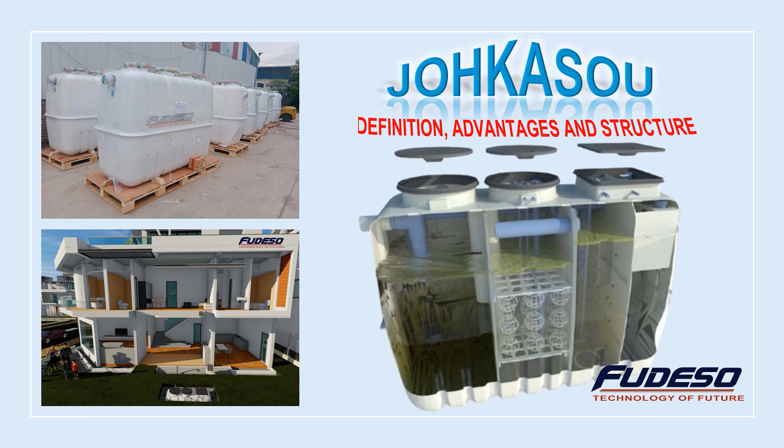Some of you may have heard of the word Johkasou. Today, let's find out what Johkasou is, and the advantages and structure of this system.

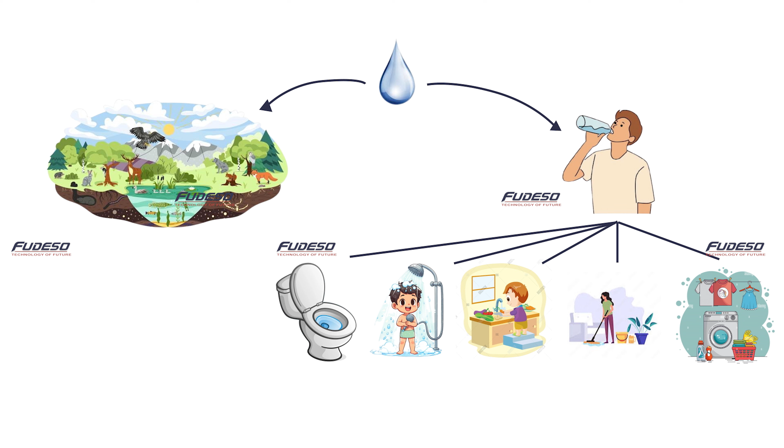As you know, water plays an important role in human life and the natural environment. But do you know that all of our activities can pollute water? Our eating, bathing, and manufacturing activities release pollutants such as BOD, COD, TSS, etc. If not treated and released into the environment, it will affect the ecosystem and the water source itself.

Especially in residential areas, urban areas, and cities, water pollution due to daily activities is more likely to occur. Due to high population density and complex distribution, the concentration of pollutants is higher. If not treated, this polluted water source will return to affect the lives of people in that area.

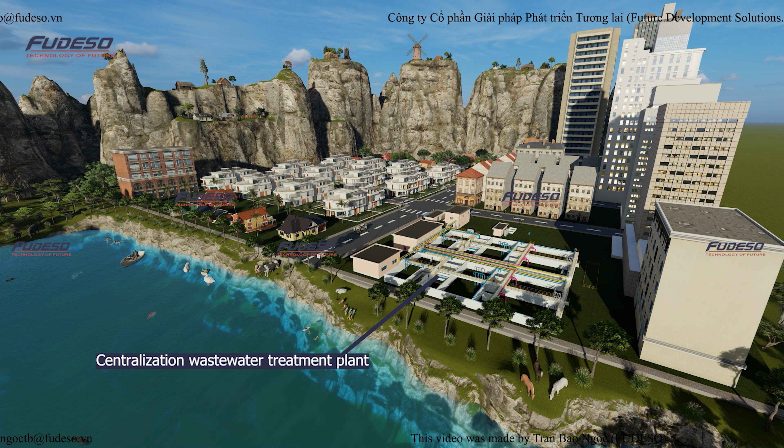Thus, domestic wastewater treatment is a mandatory requirement to preserve water resources. Centralized wastewater treatment plant is also a solution. However, it is not suitable for all cases, especially in areas without synchronous planning for wastewater collection pipeline system and land area to build centralized wastewater treatment plant.

For example, old towns or urban areas built a long time ago, rural areas where housing and population density are sparse, mountainous areas or areas with complex terrain, difficult to install wastewater collection pipe network system. Tourist areas and villas have scattered and inconsistent locations of houses, areas that suffer from many natural disasters such as earthquakes, landslides, etc. The installation of wastewater collection pipelines is prone to risks of breakage and fracture.

The project is divided into investment phases. For example, the project is expected to build 200 houses, 100 houses in the first phase. However, it is necessary to build a pipeline system and a centralized wastewater treatment plant for 200 houses right from the beginning. This is wasteful and expensive.

In addition, centralized wastewater treatment plants cause loss of space, odor, and noise, affecting the living environment and aesthetics of the city. We would like to offer a more effective solution, which is to use Johkasou.

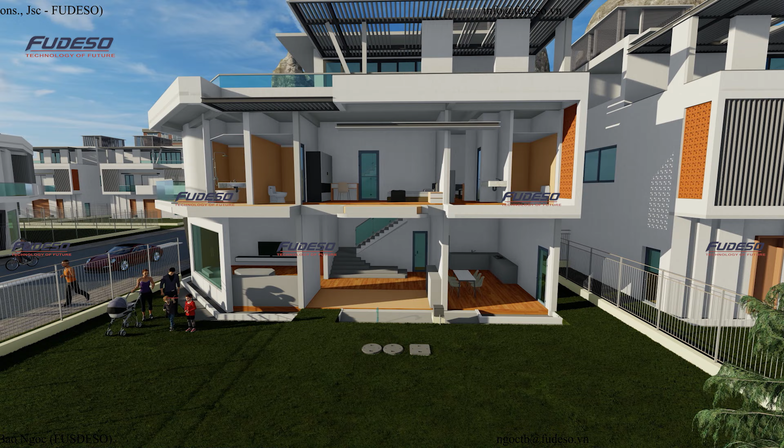So what is Johkasou? In Japanese, joka means cleaning, so means tank. Johkasou is an on-site wastewater treatment system originating from Japan. The characteristic of Johkasou is that it can treat black wastewater, which is wastewater from toilets, and gray wastewater, wastewater from cooking, washing, bathing, etc., right at the source of pollution before releasing it into the environment.

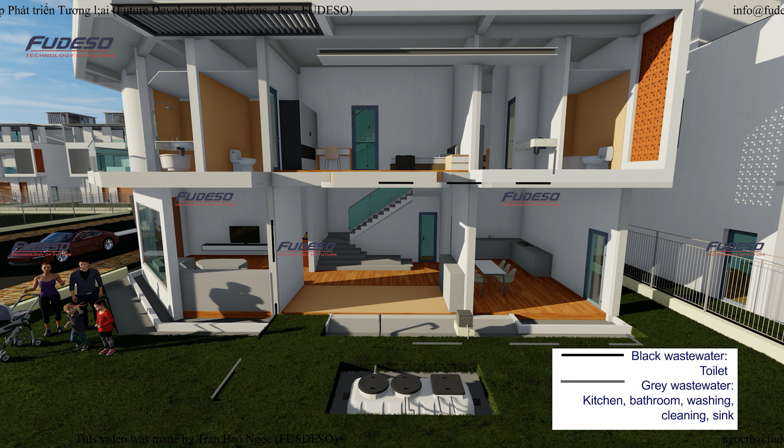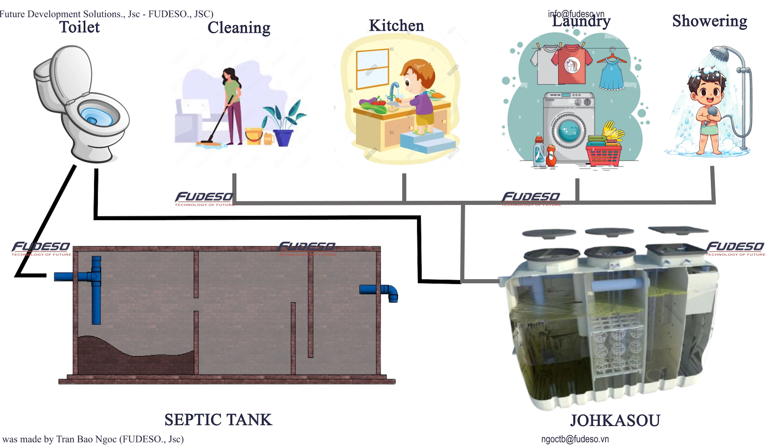Johkasou has many advantages. While traditional 3 to 4 compartment septic tanks can only receive black wastewater from toilets, Johkasou can receive all wastewater from daily activities including toilets, bathing, washing, cooking, cleaning, etc.

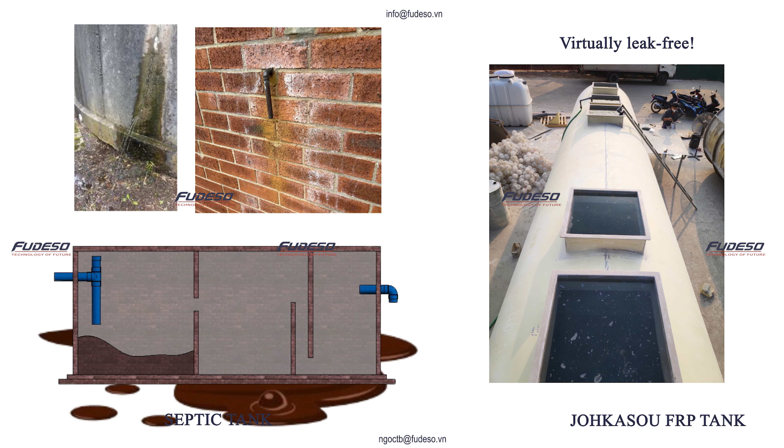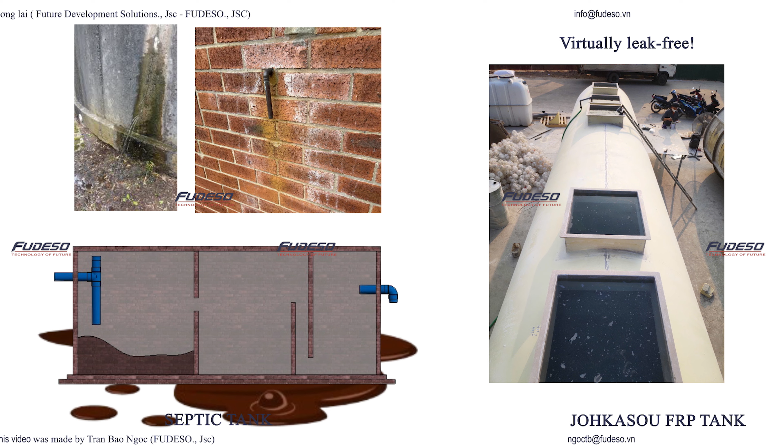Second, it has good waterproofing ability. For concrete or brick tanks, making waterproofing is very complicated. If the waterproofing is not good, or natural disasters such as earthquakes, subsidence, landslides occur, these tanks are very susceptible to leakage and cause mass environmental incidents. While Johkasou uses FRP shells, which are carefully tested for water leakage before leaving the factory, there are almost no water leaks.

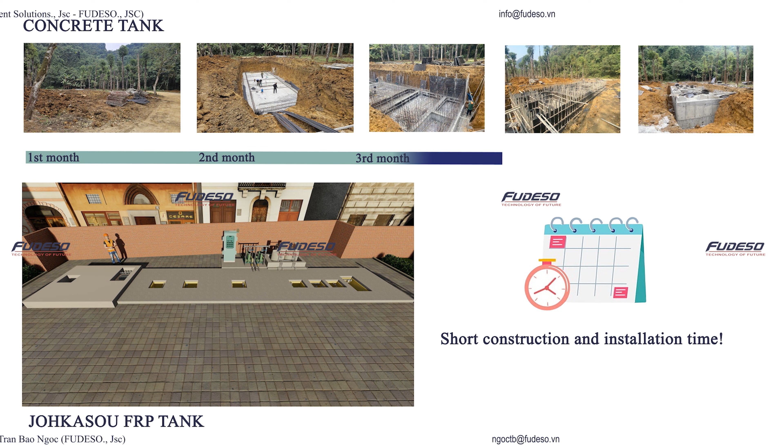The third advantage is that Johkasou has a short construction time, only about 1/3 to 1/2 of the time compared to building a concrete tank or a brick tank. Johkasou installation requires less construction work that affects the current state of the building's surface. The work is simple, just digging a hole, building a foundation, lowering the tank and filling sand around the tank.

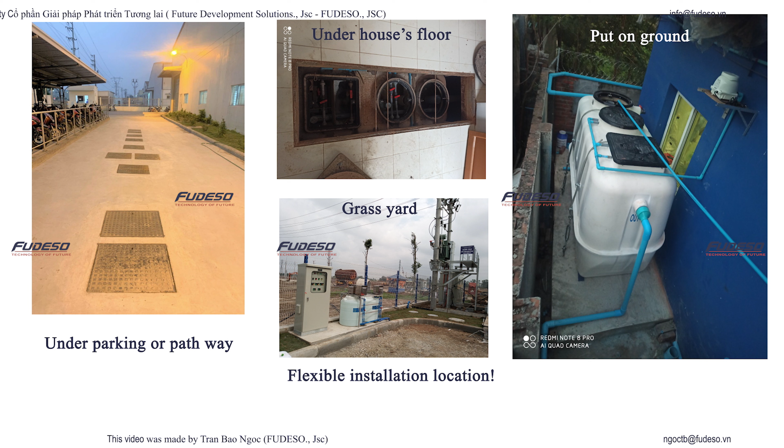Next, Johkasou has a flexible installation location. Because of its compact structure, Johkasou can be flexibly installed in many different places such as above ground, under the garage, walkways, floors, grass yard, and can even replace the traditional septic tank in your home.

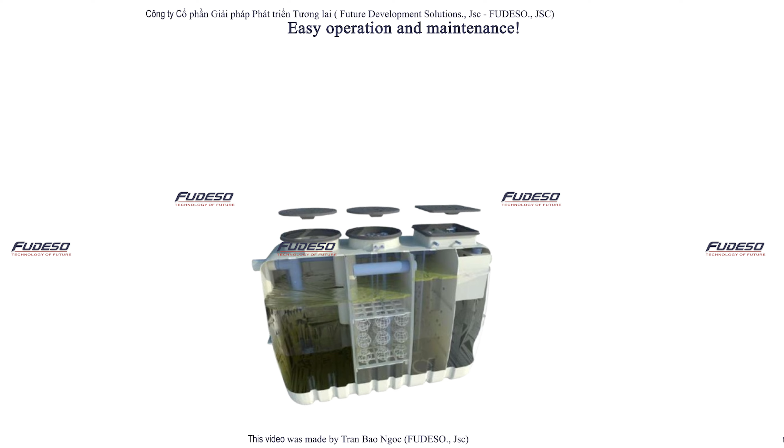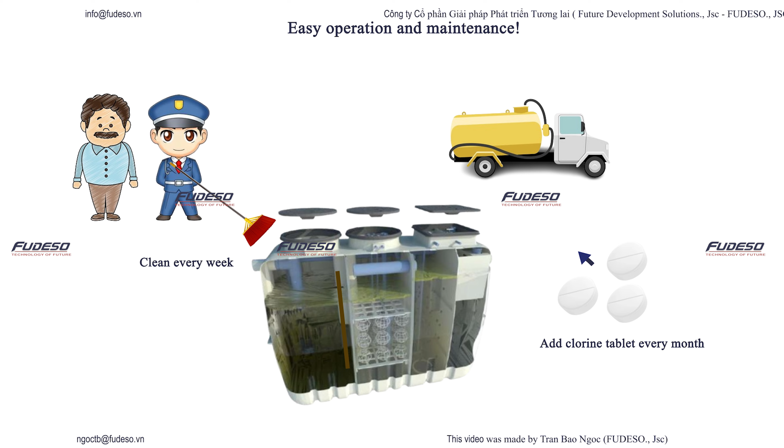Easy to operate and maintain. The Johkasou system is very easy to use. Even a building security guard or a father in the family can operate and maintain the Johkasou. Just remember 3 simple steps: weekly preliminary cleaning, monthly addition of disinfectant chemicals, and annual call for a desludge truck.

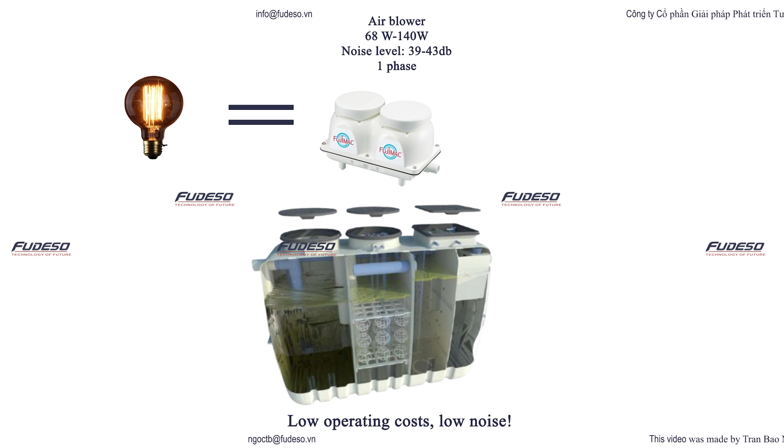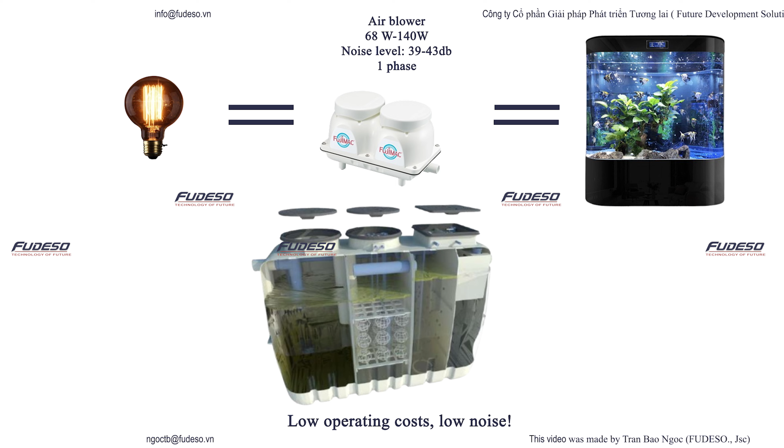Are you worried about the electricity bill for Johkasou? Don't worry. Because Johkasou mainly uses microorganisms to treat wastewater, it consumes very little electricity and chemicals. For a 1, 2, 3 cubic meter per day Johkasou system for households, Johkasou's air blower only consumes 68-140 W, equivalent to an incandescent light bulb. In addition, the noise level of these air blowers is only equivalent to a household fish tank oxygenator.

Johkasou can be used for many buildings with different purposes such as civil houses, villas, residential areas, guardhouses or warehouses, farms, tourist areas, office buildings, hospitals, factories and hotels.

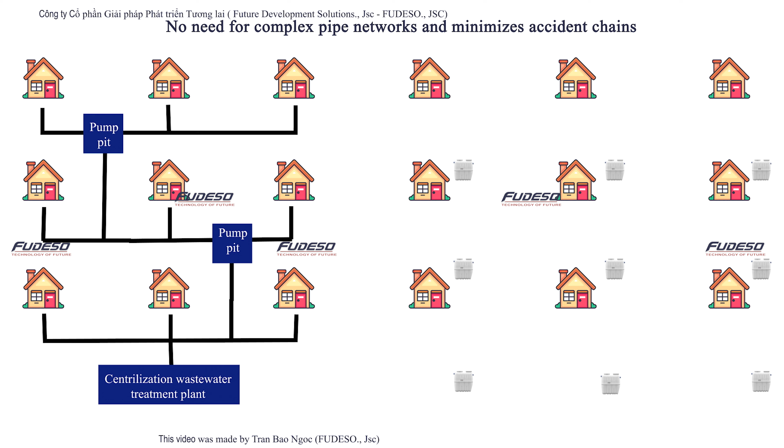In this video, I will focus on small Johkasou sets for households with a capacity of 1 cubic meter, 2 cubic meter, 3 cubic meter per day. If you want to learn about larger Johkasou systems for factories or hospitals, please refer to other videos on our YouTube page. The most important strong point is Johkasou needs no complex pipe networks and minimizes accident chains.

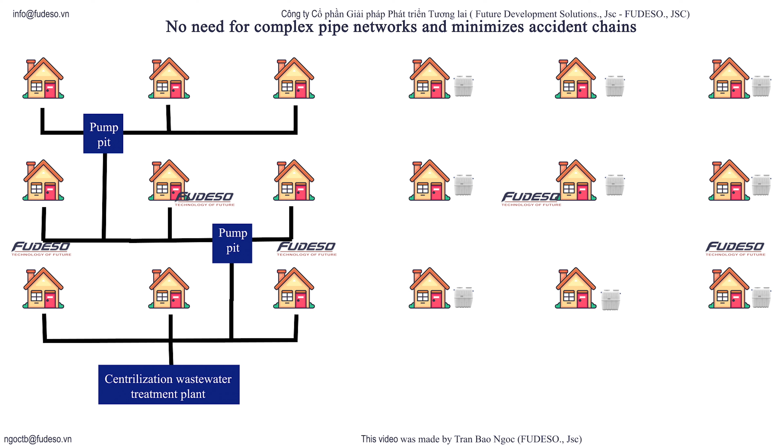Johkasou treats wastewater at the point of generation, so it does not require a huge wastewater collection network. This advantage helps Johkasou save costs compared to centralized wastewater treatment systems.

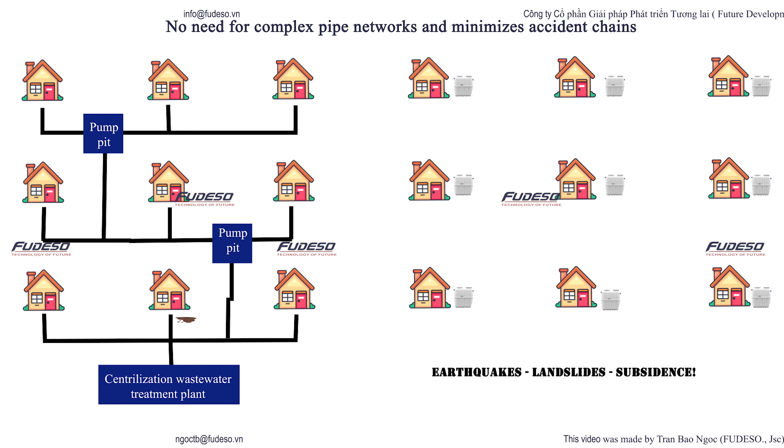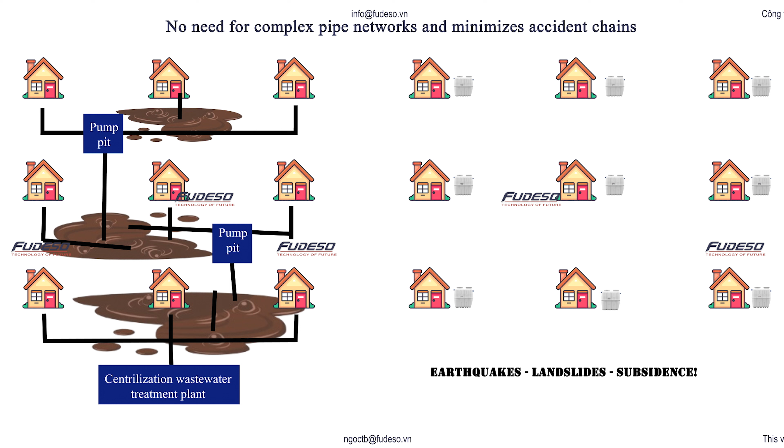In addition, if the area has natural disasters such as earthquakes, landslides, or subsidence, the wastewater collection networks are easily broken or collapsed. Wastewater cannot be treated, causing major incidents. Repairing this sewer system is very difficult and expensive because they are buried underground, and if repaired, it will affect the buildings above ground. But this does not happen with Johkasou tank options.

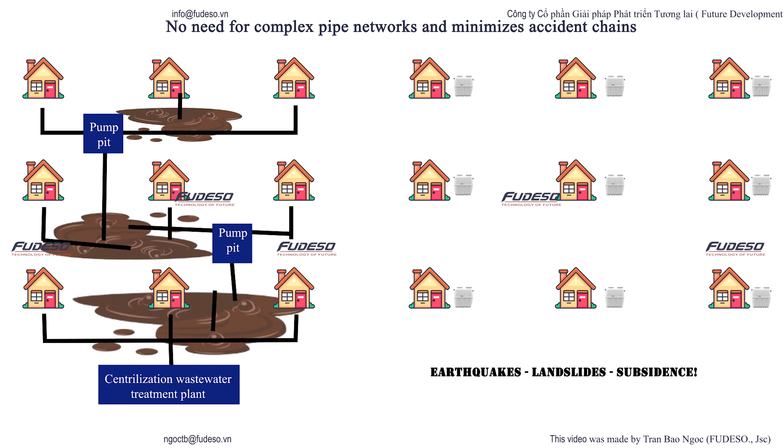Because each Johkasou system operates independently, if an incident occurs, it will only occur locally in that system without affecting other systems, helping to avoid a series of consecutive incidents.

Last but not least, Johkasou can help investors allocate budget effectively according to each project phase. For example, a project to invest in 500 houses.

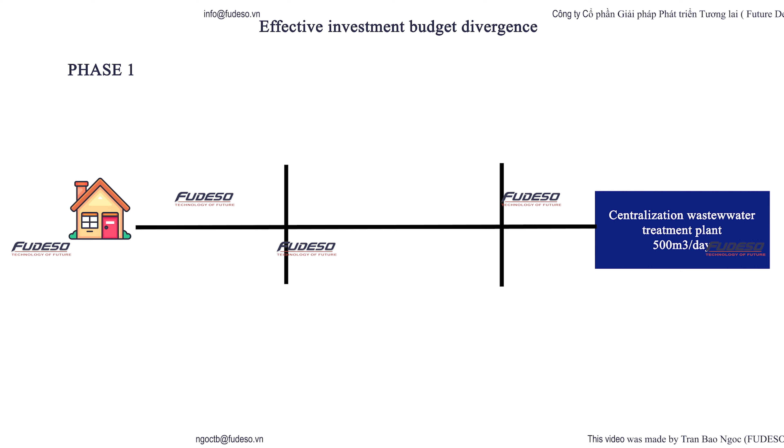Each house is estimated to generate 1 cubic meter of wastewater per day. The project is divided into investment, construction, and sales phases as follows: first year build 100 houses, second year build 200 houses, third year build 200 houses.

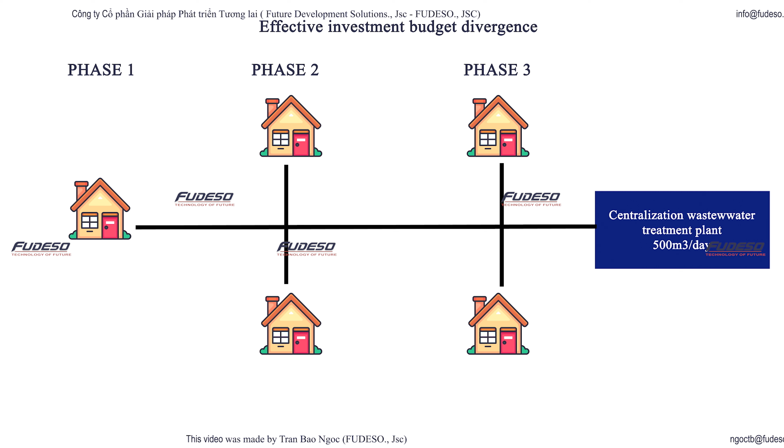Thus, if a centralized wastewater collection system is built, the investor will have to spend a huge amount of money to build a collection pipeline system and a wastewater treatment plant with a capacity of 500 cubic meters per day and night from the first year of the project. Meanwhile, the number of apartments put into use is only 100.

The input flow is only 1/5 of the design capacity. This causes a huge waste. If using Johkasou, the investor can install Johkasou units and sell the houses accordingly. This option helps investors save more and allocate budget resources effectively.

Here is a summary of the advantages of Johkasou.

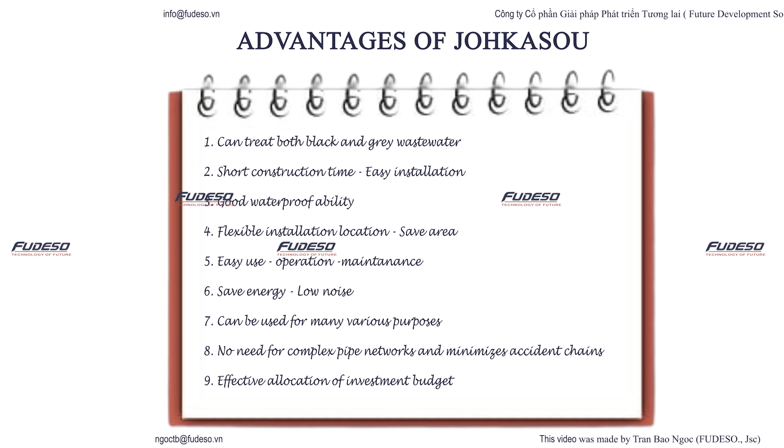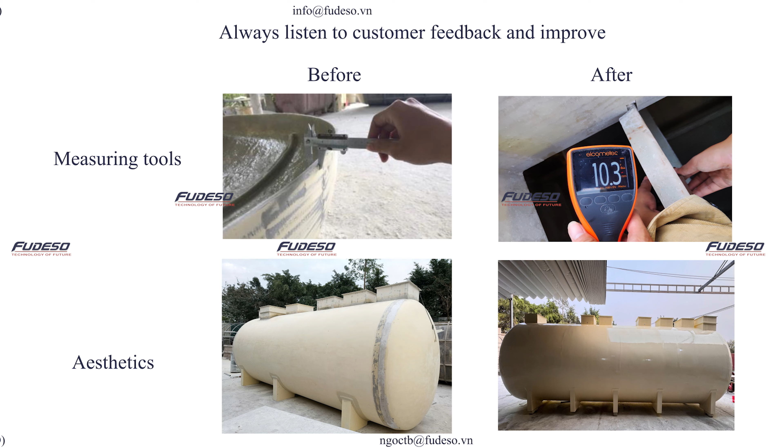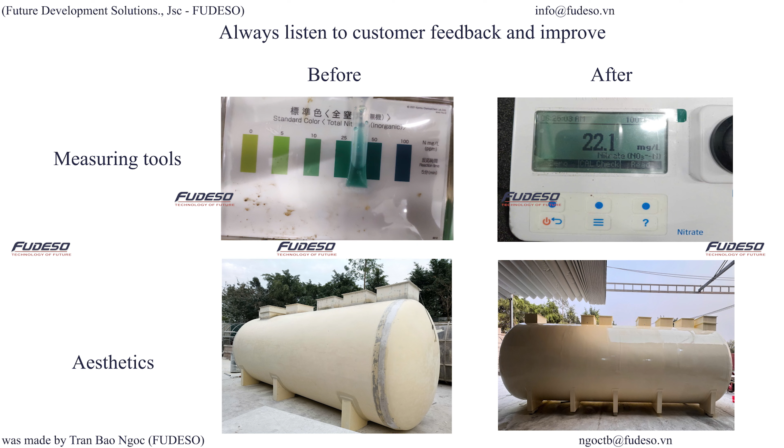So why should you use Fudeso's Johkasou? First, Fudeso always listens to customers' opinions and improves every day. With more than 15 years of operation, Fudeso always upgrades its products to satisfy customers, such as upgrading the aesthetics of the FRP tank shell and upgrading measuring tools from manual to automatic display.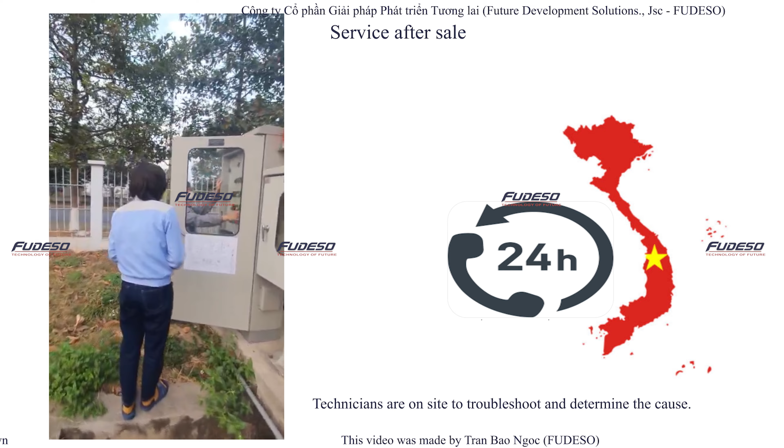Second, after-sales service. We commit to providing free online consultation to all customers worldwide about Johkasou systems or wastewater treatment issues. For projects in Vietnam, we commit that within 24 hours of receiving feedback about problems with the wastewater treatment system, Fudeso technicians will be present at the site to find the cause and fix the problem.

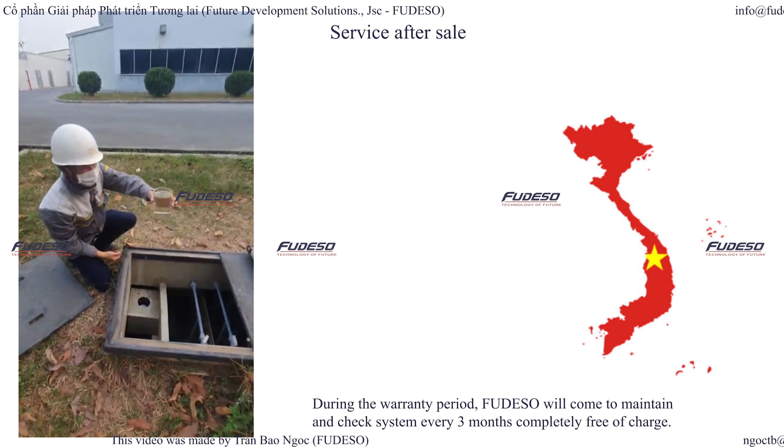In addition, we will instruct customers on how to use and transfer technology to customers so that customers can control water quality in the most proactive way. During the warranty period, Fudeso will check the Johkasou system for free every 3 months. Technicians are also equipped with modern measuring equipment to monitor water quality on site most accurately.

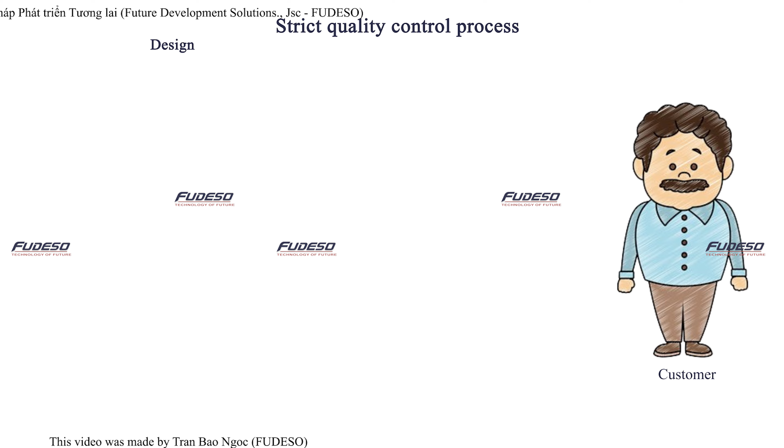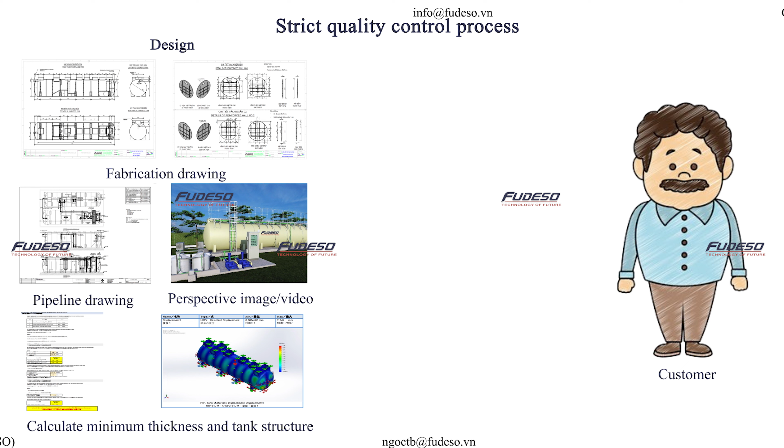Strict quality control process. Throughout the production process, customers are directly involved in quality control to achieve the highest quality products. After receiving the project information, Fudeso will proceed to design and send all design drawings to the customer. The set of documents includes FRP tank shell fabrication drawings, pipe connection drawings, electrical control cabinet drawings, even 3D perspective photos and videos for customers to easily visualize.

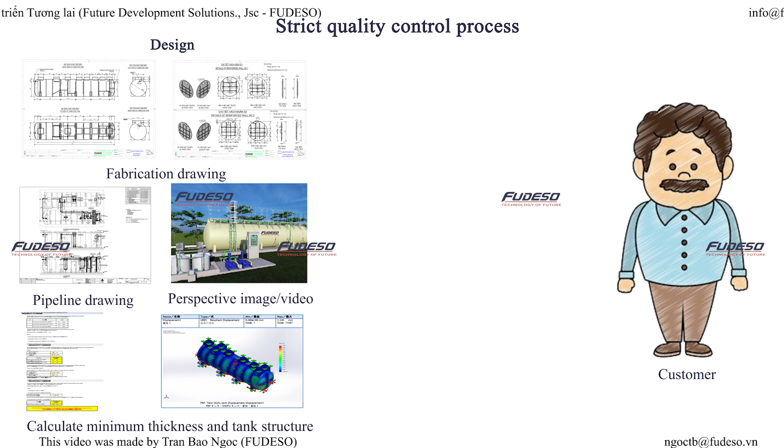Calculating the structure of on-site wastewater treatment tanks is currently still neglected in some companies, leading to many unfortunate incidents of tanks during use. We only produce if the customer approves the design.

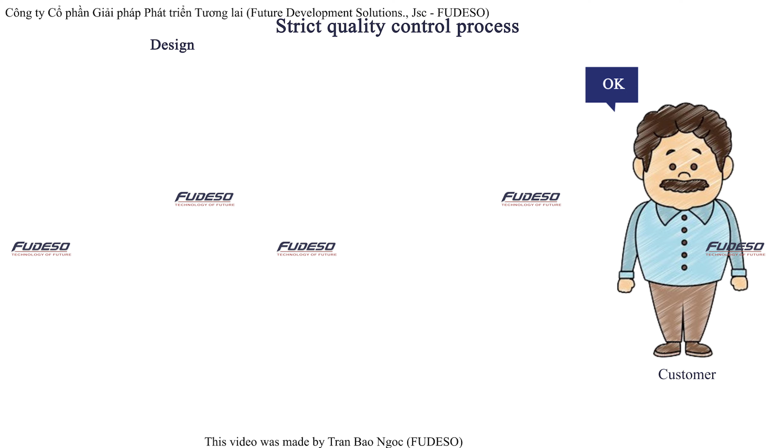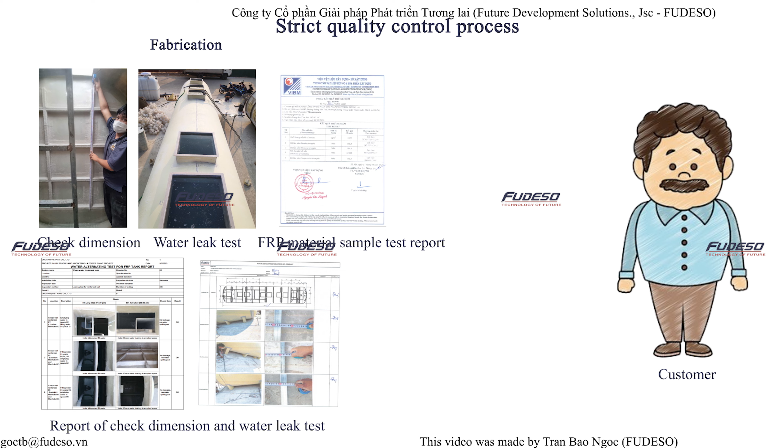During the production process until the manufacturing is completed, inspection reports are continuously sent to customers, such as shape and size inspection reports, and water leak test in 24-hour reports. Even the results of material sample analysis to see if it meets the required strength.

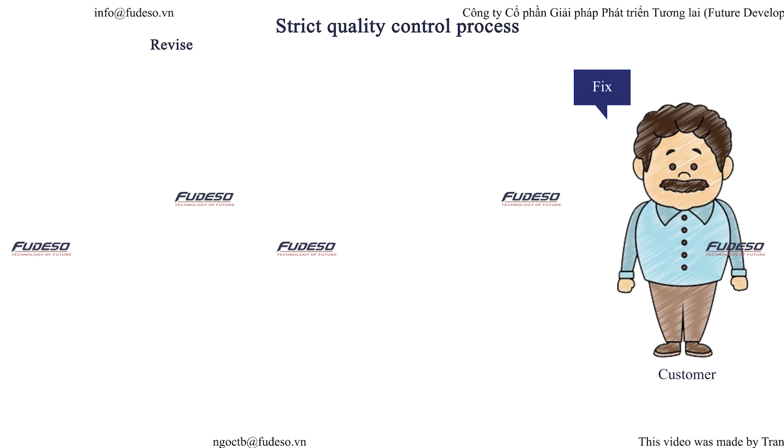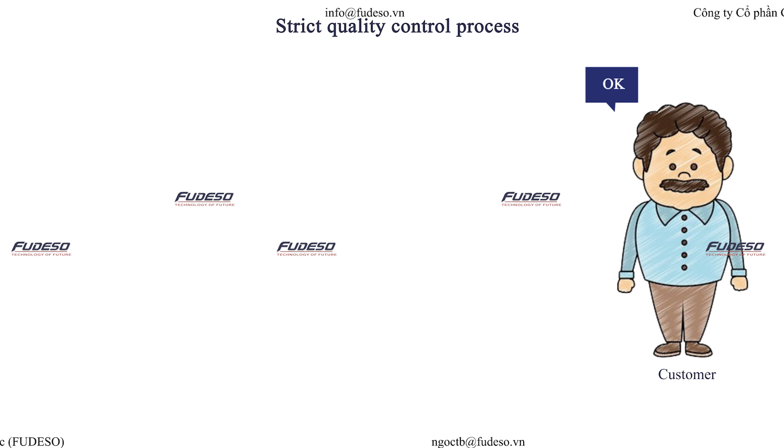If the customer has any comments during this process, Fudeso will make corrections and send back reports before, during, and after the correction. This process is repeated until the finished product is created and meets the customer's requirements. After completion, customers can go directly to the Fudeso factory to check the product themselves.

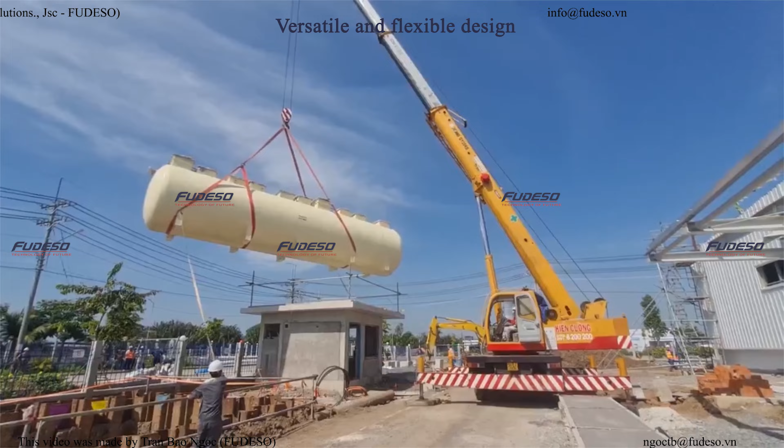Fourth, design diversity and flexibility. Fudeso understands that no two projects are exactly the same. Each customer will have different requirements, standards, and budget limits. Therefore, Fudeso has launched many new designs and molds to be flexible with each project.

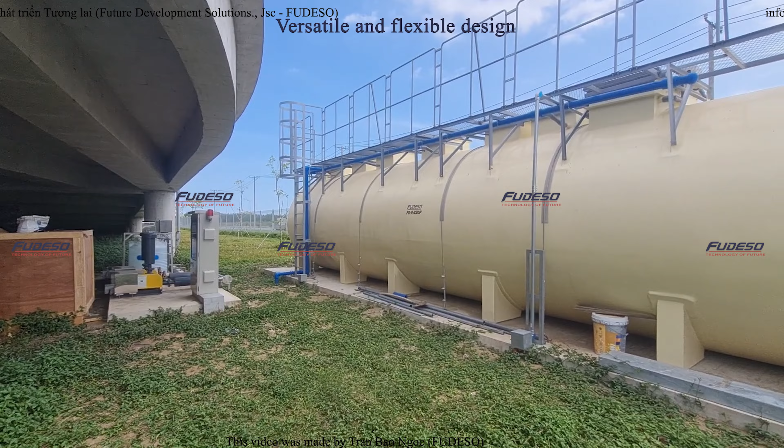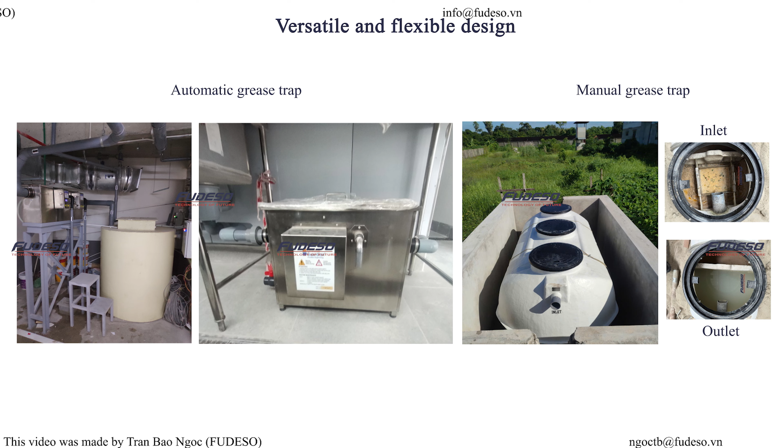Fudeso has 4 types of cylindrical molds with different diameters, of which the 2 meter and 2.2 meter diameter types can be placed in international shipping containers. In addition, from 2023 we will develop more capsule-shaped mold sets for small household wastewater treatment tanks. Manual grease traps from 1 to 6 cubic meters are also commercially available alongside European automatic grease traps.

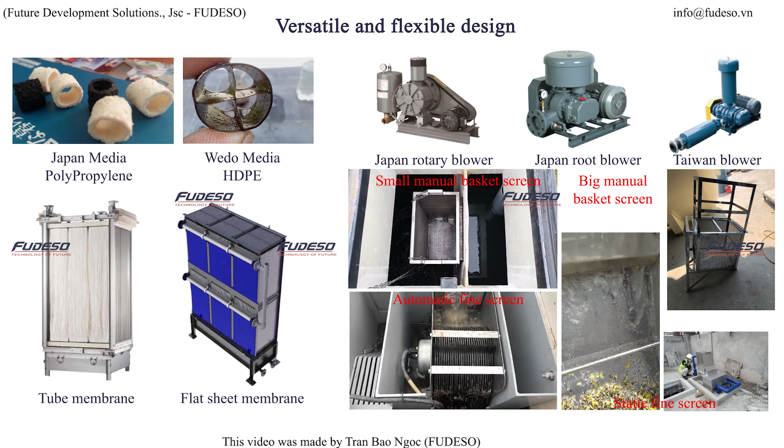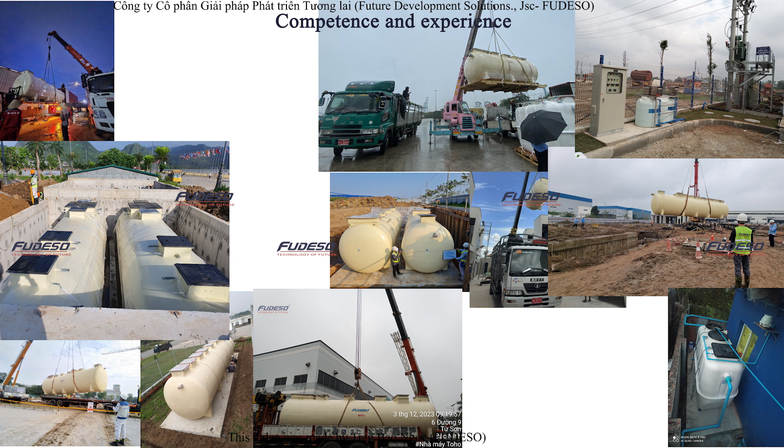With the equipment used in the Johkasou system, we also have many different choices for customers. Last but not least, competence and experience. As of 2024, with 15 years of operation, Fudeso has implemented more than 200 Johkasou projects at home and abroad. Since our establishment, we have registered trademarks and author copyrights to increase our recognition.

Since 2023, we have been granted exclusive patents and ISO 9001:2015 certification to protect our designs and protect the interests of Fudeso distributors.

We are honored to be an inspiration and partner of experts in the same field in Vietnam, Myanmar, Japan, and the UK. Fudeso's goal is not only business but mainly the desire to contribute our small part to the development of science and technology, environmental protection, and sustainable development of Vietnam in particular and the world in general.

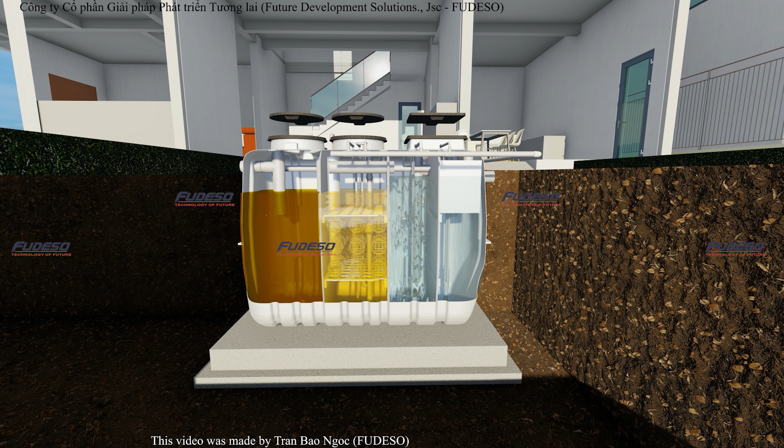In the final part, let's learn about the structure of Fudeso's Johkasou tank for household use. Domestic wastewater often contains large impurities such as feces, toilet paper, and sand. These impurities settle by gravity to the bottom of the sludge tank, avoiding clogging of the next tank compartments. The water will then go to the anoxic tank and MBBR tank and begin the microbial treatment process.

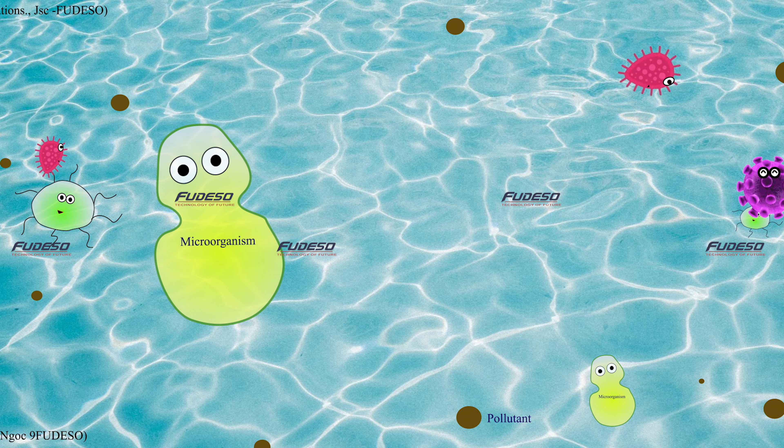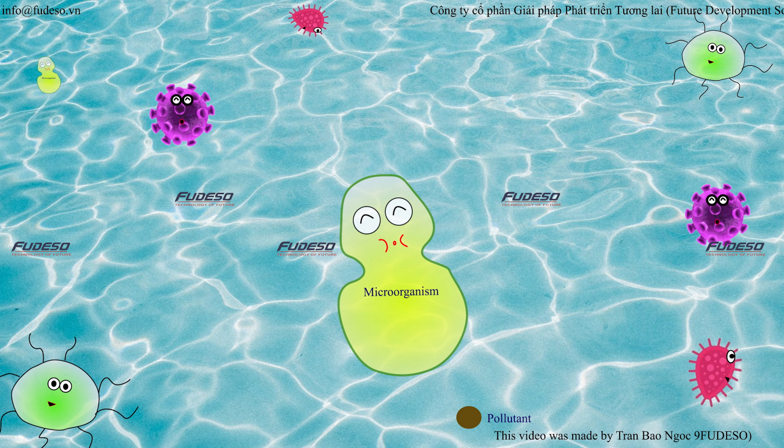Microbial wastewater treatment is a method of cultivating and maintaining microorganisms so that they can grow, develop, and decompose complex organic pollutants in wastewater into simpler substances that do not pollute the environment. Microorganisms use pollutants as their food. Through the metabolic process of microbial cells, carbon-based pollutants will be converted into water, CO2 gas, biomass, and release a small amount of energy. In addition, with the presence of oxygen, the nitrification and denitrification processes are also carried out

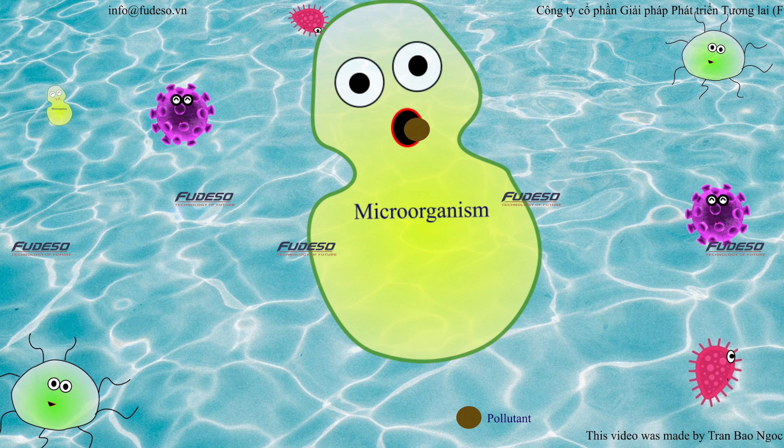by microorganisms to convert ammonium in human urine into nitrite, nitrate, and the final product is nitrogen gas. Depending on the culture environment and the amount of dissolved oxygen in the wastewater, there are many different kinds of microorganisms, taking on different roles.

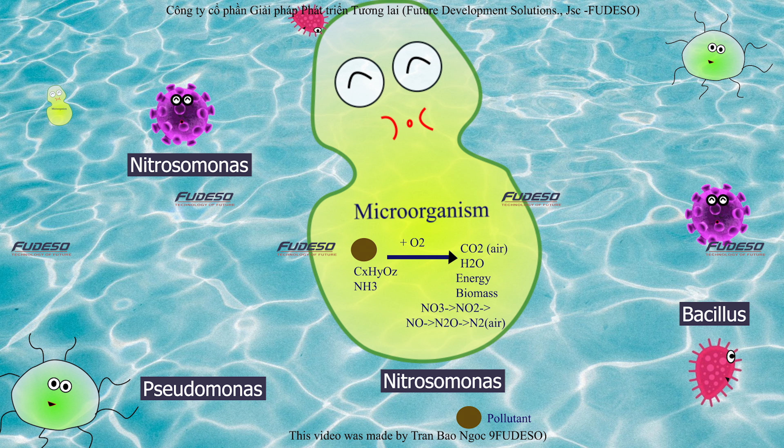In general, there are 4 most important kinds of microorganisms, including nitrosomonas and nitrobacter in the aeration tank, playing a role in the nitrification and BOD decomposition process. Pseudomonas and bacillus reduce nitrate in the anoxic tank. In the Fudeso design, the anoxic compartment uses a spherical substrate and coarse aeration to mix nutrients while ensuring DO below 1 mg per liter.

Wastewater will then be transferred to the aerobic tank. There are many different aerobic tank technologies. Fudeso chooses to use MBBR technology. This is an improved technology from the traditional aerotank activated sludge technology by adding to the wastewater media with high mechanical strength, large surface area, and good adhesion.

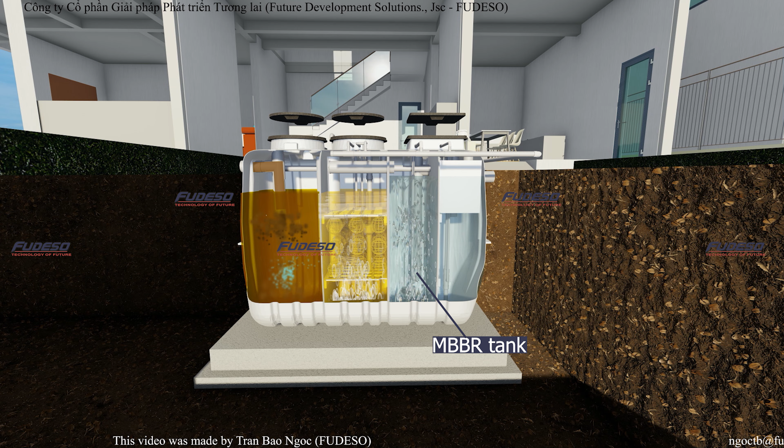Now let's learn more about these MBBR media. MBBR media is like a house for microorganisms, where they continuously grow, develop, degrade, break down complex pollutants into simpler substances that are not harmful to the environment, and repeat this process. This creates many layers of microorganisms on a media surface, and this is an important factor that makes MBBR technology more stable than traditional aerotank technology.

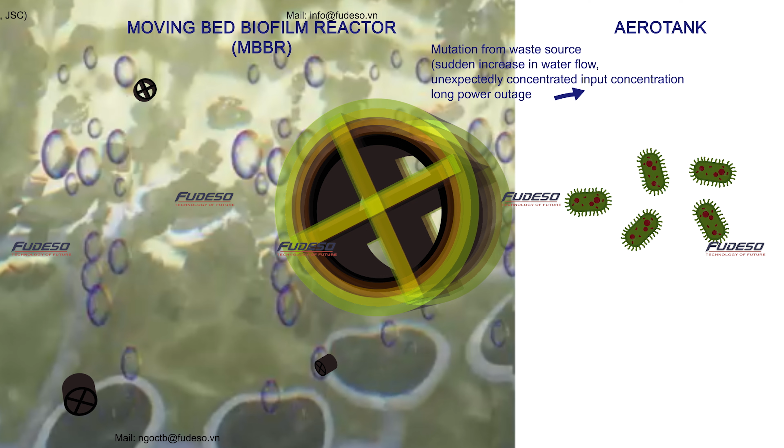For example, if there is a sudden change in the inlet wastewater, such as a sudden increase in flow, or a sudden increase in pollution concentration, or a long-term power outage, microorganisms in the aerotank are very vulnerable due to lack of protection or adhesion. They will be shocked, die en masse, and drift with the sludge, leading to loss. Raising microorganisms will be very time-consuming, taking 1 to 2 months.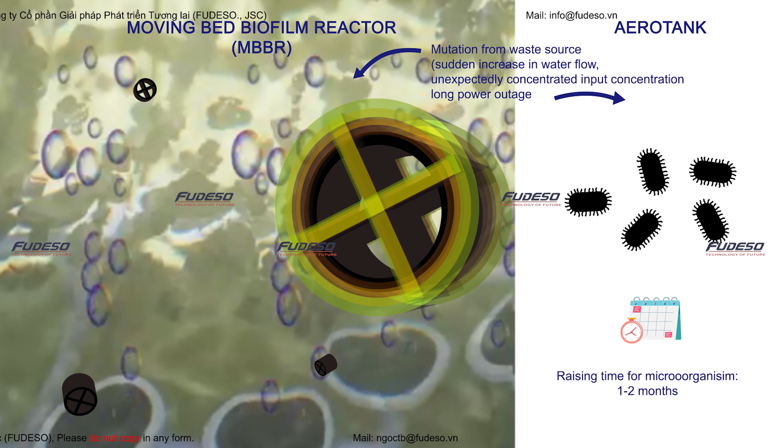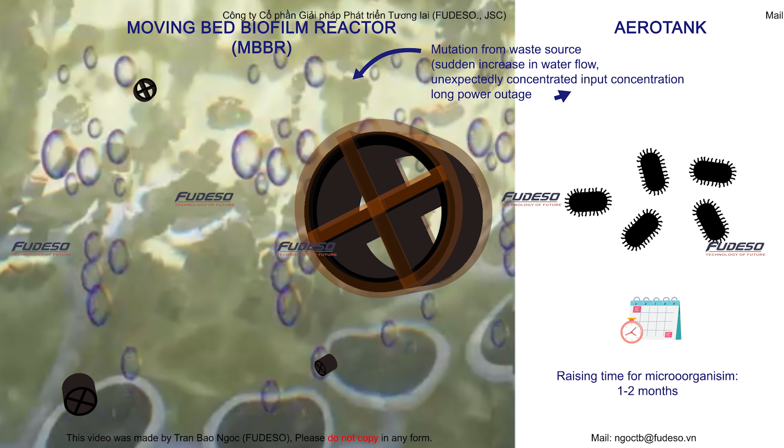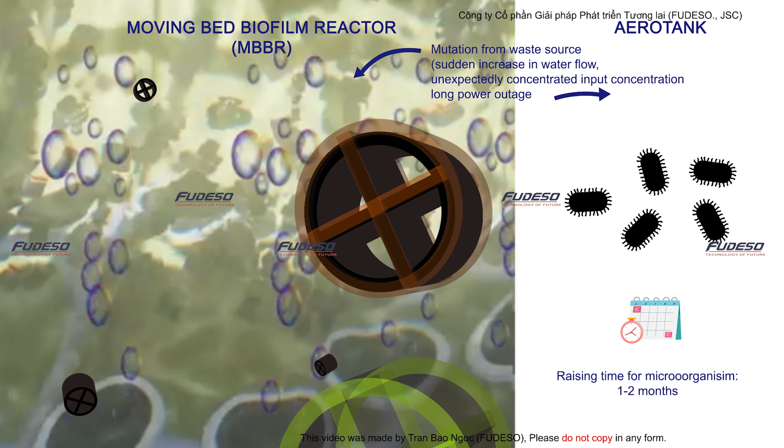The same case with MBBR technology is different. Only the outer layers of microorganisms are affected and lost. The inner layers of microorganisms still exist and they continue their development process, creating many new layers of microorganisms to replace the old layers. This is the reason why MBBR technology has better endurance and stability, and the time to recultivate microorganisms after mutation will be much shorter, only about 1 to 2 weeks.

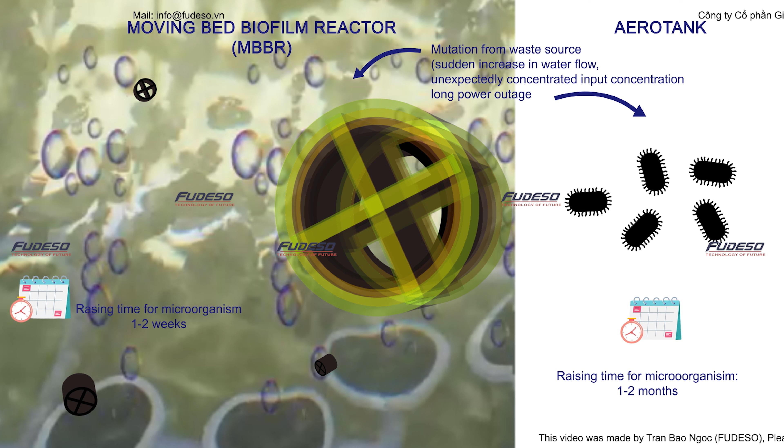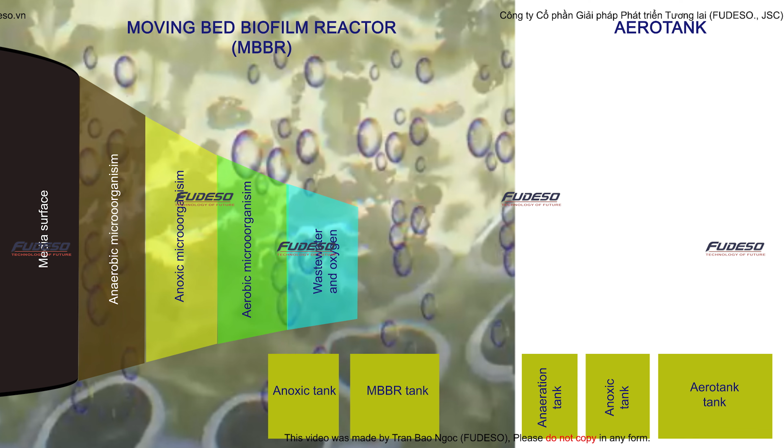Not only are there many layers of microorganisms, on one media surface there are also 3 types of microorganisms present at the same time: anaerobic microorganisms in the innermost layer, anoxic microorganisms in the middle layers, and aerobic microorganisms in the outermost layers. This helps MBBR have higher treatment efficiency and a smaller tank volume compared to aerotank technology, which requires you to create an environment for each type of microorganism separately.

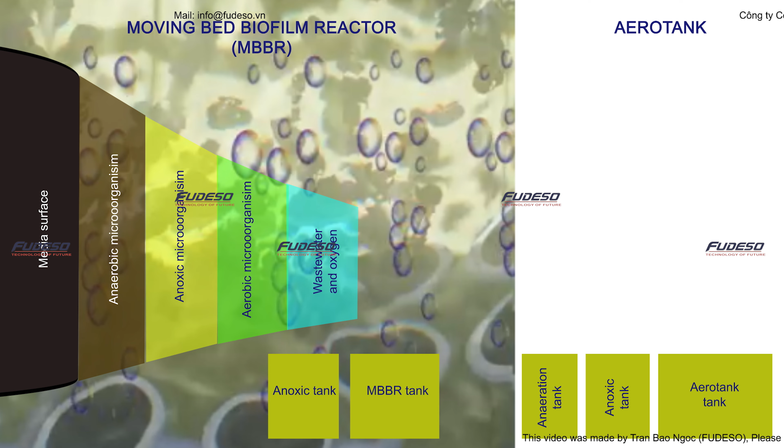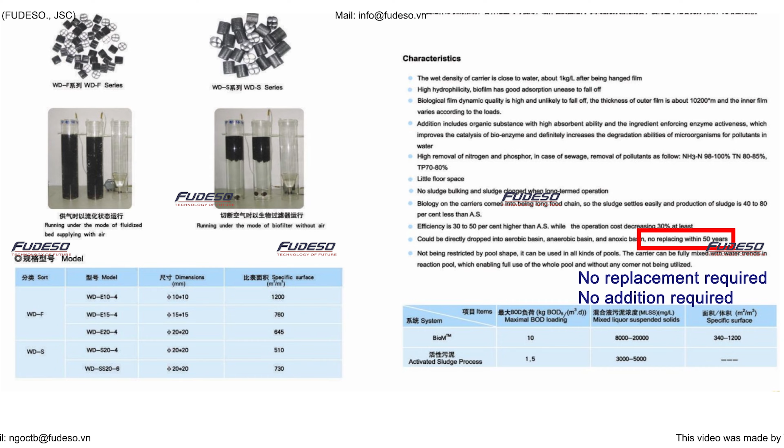Finally, Fudeso uses media made from HDPE or polypropylene, which have a lifespan of up to 50 years according to the manufacturer's research, with no need for annual replacement or replenishment during use. The sludge produced by the biomass of microorganisms settles to the bottom of the sedimentation tank. The water goes into the filter box to remove floating sludge and through the disinfection box to remove pathogenic microorganisms before flowing into the environment.

Nitrate-rich water after the MBBR tank, and sludge settled to the bottom of the tank, will be pumped by an airlift pump to the sludge tank and anoxic tank to carry out the denitrification process. The pollution treatment efficiency of this Johkasou tank can reach more than 90%.